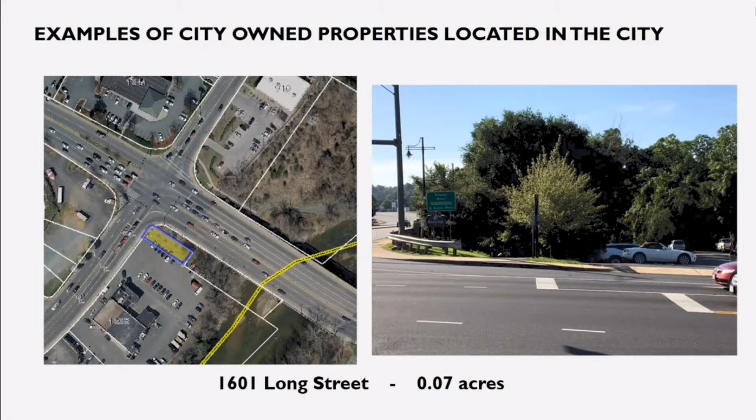Another property, and this would fall under that category or description of other parks and trails type properties. This is a property the city owns over by Free Bridge that is actually an entrance to a trail. So just to give you some idea of these smaller parcels that are located throughout the city, this is a good example of that.

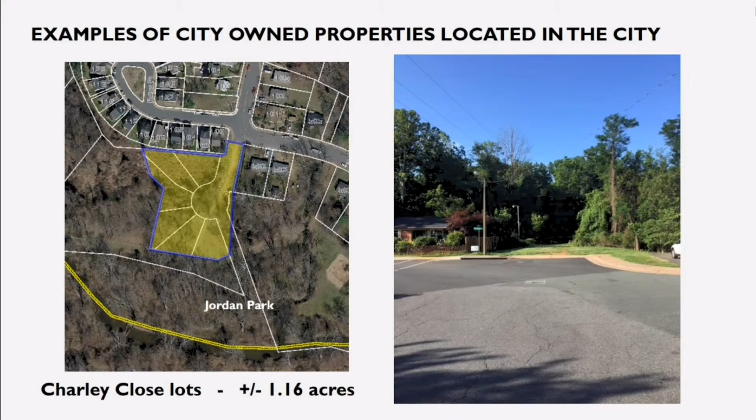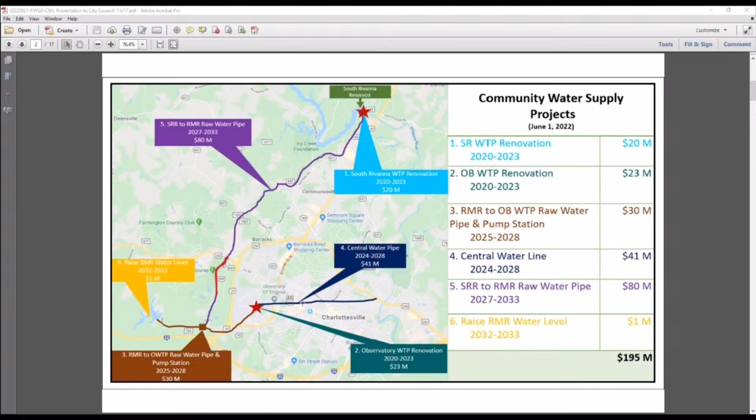if we expand the water treatment plant and we replace the raw water line to get it to the treatment plant, it has no benefit if we can't really get that water out into the system. So this was going to, again, be a larger pipe to help us get water into the urban drinking water system.

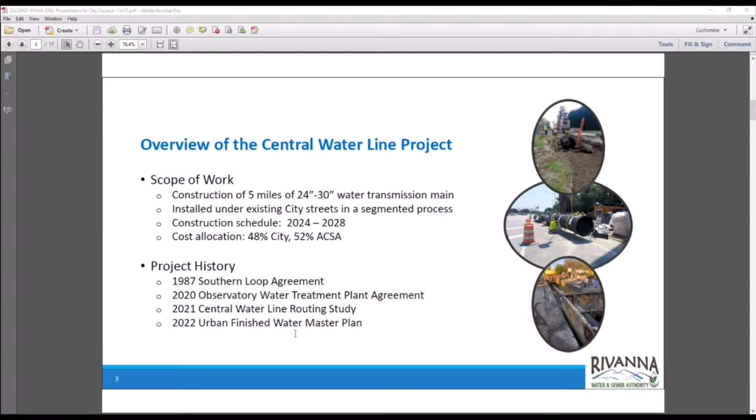Now, when I say terminate, the large pipe stops and a smaller distribution pipe takes over, the ones that the city would own. And our goal of all this was to get the Observatory treatment plant connected to the Pantops tank at Free Bridge, which is where the water line would connect.

Because our purpose is that the way we operate the system, to some degree, we make water a lot at night, and we fill all the tanks that are in our system at Observatory, at Avon, and over at Pantops. And we fill those tanks at night, and then during the day, they provide the flow and the pressure to the customers within the area, and we refill the tanks at night.

So part of our challenge was we had poor connectivity between the Observatory treatment plant, we still have it, and the Pantops tank. We can get water from Observatory to Avon, and we can get it from South Rivanna treatment plant to Pantops, but it's difficult to get water through all the small pipes across the city from west to east to the Pantops tank. And that was the problem and the issue we're trying to solve with this piping project.

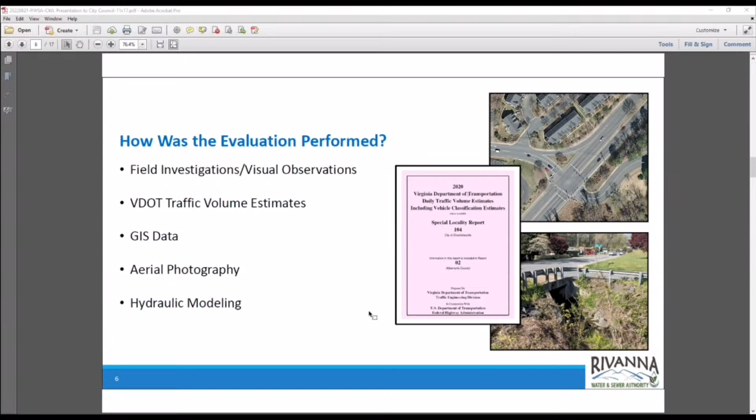We've looked at the VDOT traffic estimates that they provide. We've looked at GIS data, aerial photography, and we've done extensive hydraulic modeling to let the computer tell us how the water flows best in these various piping alternatives. We looked at the water distribution benefits from the water modeling, at the traffic counts, the impact to neighborhoods, businesses, the UVA academic side, the UVA medical district and hospital area. We looked at the street widths to see where we could work reasonably within streets.

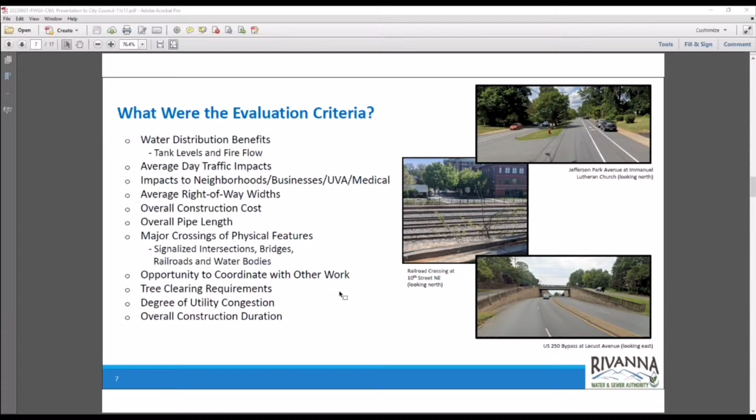And overall construction cost was an important factor. We looked at pipe lengths. We looked at opportunities to coordinate with city projects or other projects and tree clearing, and even underground utilities. It's easy to say put a pipe in the street, but if there are already a bunch of communication cables and other pipes in the way, we can't do that as easily. So we've looked at a number of different factors when we come up with the recommended alternatives.

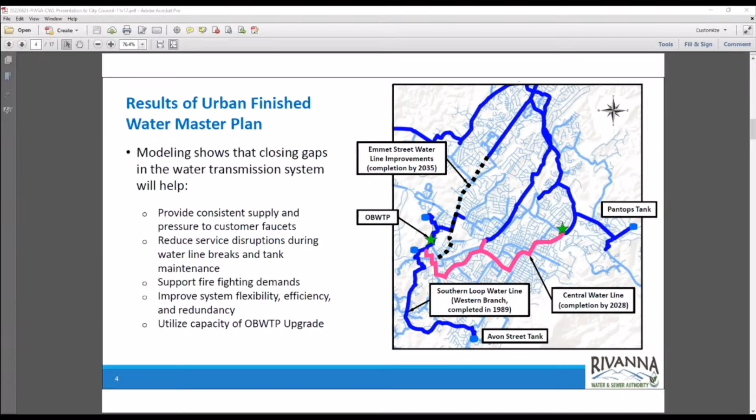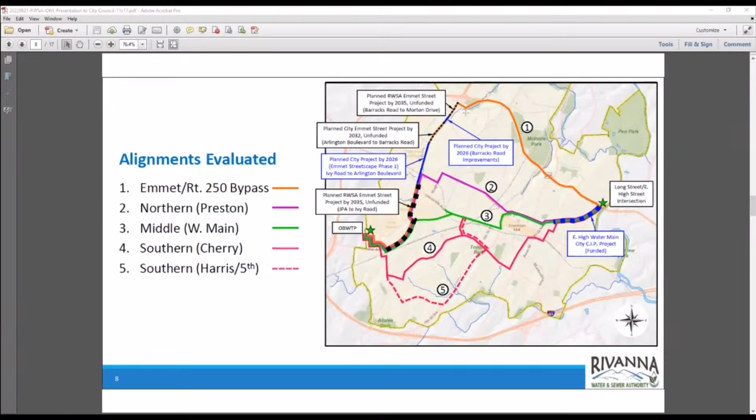Yeah, so to go this alternate route, if we were hypothetically to do it, the proposed pipe diameter would have to go up due to more flow going across that route, and also more distance in terms of friction losses. That's right. So what I was understanding, it's not just enough to say, well, there's already a pipe up there. The pipe that's being planned is 6 inches smaller than what y'all need, and 6-inch, it's significantly more piping area that would be required, so.

Correct. We did plan on this Emmet Street pipe, which is intended to be built when it's convenient, when we can have what we call a betterment project. That is when UVA is doing a project along Emmet Street, maybe at Emmet and Ivy, we're doing a betterment project with them right now. Or VDOT, when they were going to make improvements to the Hydraulic interchange, that whenever we can partner with the city or UVA or VDOT, and they were already going to rip the road open to do some utility work, we would join with them, and that would be the time we would put in our new pipe to create this redundancy with the other pipes in bringing water in and out of the city.

So it was not a definitely planned project, and we envisioned it by 2035. But again, as you mentioned, Mr. Pinkston, the purpose was to transmit water from the South Rivanna plant into the city and connect it with the Observatory treatment plant. And the pipe size required to do that is not the same as the pipe size trying to get water over to Free Bridge along a longer route. And we would have to upsize the pipe and incur additional expense. And that is included in the $60 million for us to do that.

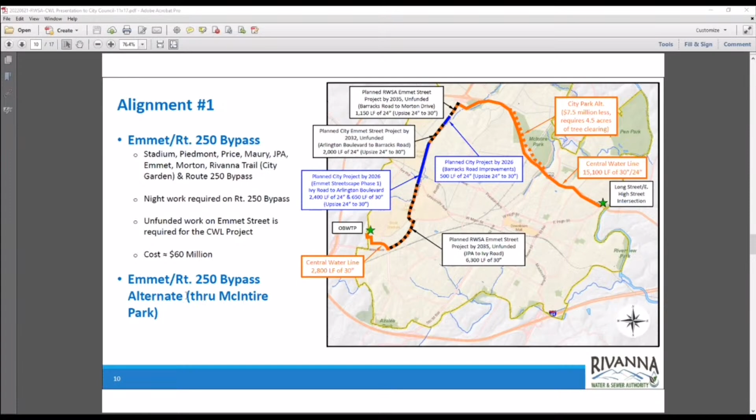So I mentioned we looked at the alternative of cutting through the park that might save some money. If you're ready to go on to the second alternative, that's what we call the Northern Preston alternative. Again, we go from Stadium up JPA or up Stadium Road, up Emmet Street. It would turn to the east through the University Lambeth area, where we connect into a city pumping station. Then it would go up Rugby Road, down Grady, down Preston. It would then go up the hill to West High Street and find its way to East High Street.

Now, that is an area where the city has a project planned along East High Street, and some of our strategy is to try to connect and do our pipe at the same time the city does your pipe, and that's why you see the blue dotted line here. This is where we are partnering with the city to do a water line project along with your project. There's also a project in an earlier section of that too.

I'm sorry, I couldn't hear you. There's another project at an earlier section. Oh, right here? Rugby to Preston. That section of Barracks, Emmet, right there, up Barracks, up Preston. The city has this project from Ivy Road to Arlington Boulevard. That's planned. And we would be partnering with the city there also. The bike streetscape, up the Barracks Road Hill up there by Rugby. Barracks Road. This turns to Rugby.

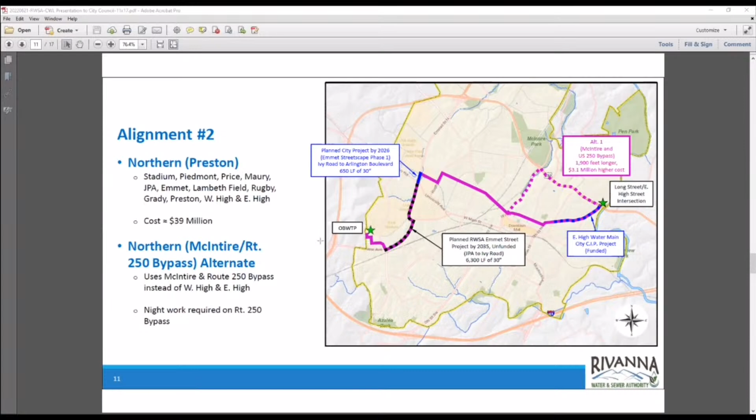Thank you. The third route we looked at was what we called the middle route, West Main Street. And I think this was really born initially from an objective of coordinating with the city on your West Main project. And of course, that's not happening anymore.

But the route was to go up JPA, then it would turn further on JPA through the academic area of the university and the medical district and by the hospital, and go down Main Street, go down at Vinegar Hill down Ridge to Preston, and then back up that hill there to West High Street to make its way to East High Street.

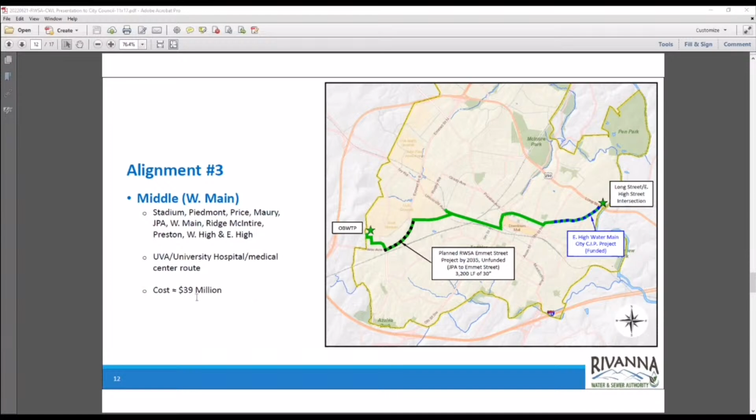The concerns with this route were the congestion of traffic and pedestrians and business impacts through the UVA academic area, the hospital medical district, as well as the business area on West Main Street, West High Street. But this one also had a cost estimate of $39 million.

But the fourth route we considered and reconsidered was going down Jefferson Park Avenue Extended, I would call it. We go down Cleveland, then we follow Cherry across Ridge Street on Elliott Avenue. It turns to the north on 6th Street, and then before it crosses the railroad track, it goes across Avon and would come under the railroad track around 10th Street, and then go to the east on Jefferson and over to East High Street on 11th Street. And that is our recommended route.

Now, when we had our neighborhood meetings, they said, well, what about going down Harris all the way to 5th Street and come up 5th Street? So we took a careful look at that. We found that there were two disadvantages. One, it was going to be about $8 million more expensive because it's a longer route, much longer route.

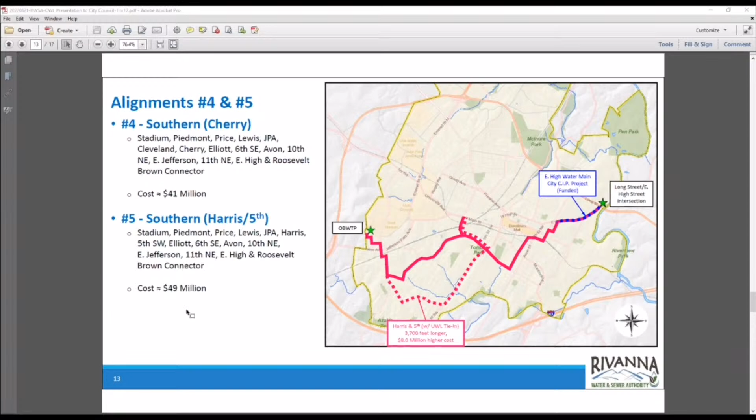And further, as you know, 5th Street is a major street for emergency services that come in 5th and then turn on Cherry to get to the hospital area. So working in 5th Street with its high traffic count seemed to be an impediment to that route. And that was the reason we were not recommending it. The estimate for the Harris Fifth Street alternative, we estimate about $49 million.

We also heard from our neighborhood meetings about going down Shamrock Road. And we've talked to Brennan Duncan pretty extensively about that because we think it would save about $3 million. It's a shorter route. But Shamrock is such a narrow street, no shoulder on one side with on-street parking, very congested. You have the railroad track and the vertical curve leading up to that, below the railroad track.

We thought, even though it would save some money, it would be a major impediment on the Shamrock Road neighborhood. And that's why we're not recommending that route, but it is possible. And further, we heard from residents about, instead of coming across.

I'm sorry, Bill, quickly, just with that one, the Shamrock alternative, it's significantly shorter. I'm just wondering that, if it's shorter, it'll take less time. If you do it in the summertime, I don't know about that impact, it'll be harder and more difficult, but it'll be quicker and cheaper. I'm just kind of thinking out loud.

Potentially, the challenge, Mr. Wade, is with that restricted curb-to-curb width of getting traffic in and out of there. It could slow down work. Oh, okay. While it's shorter, we think it will save some money and probably time, but it's going to be a real headache for the people who live over there. Either us trying to get them through, or asking them to detour to come back to their house. So again, this is a viable route, but it was our judgment, and Brennan did concur that this was not a recommended alternative.

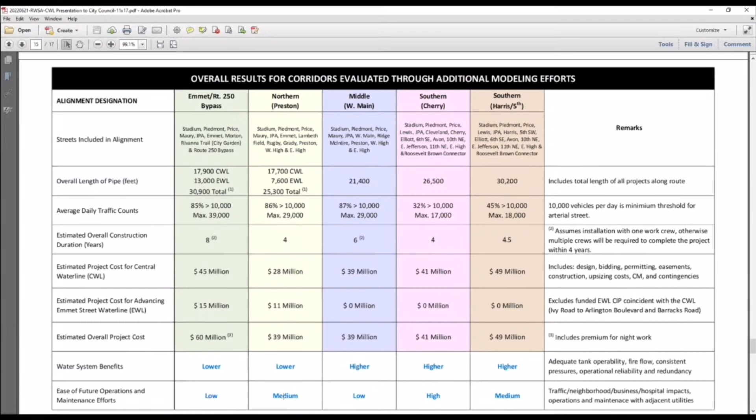And further, when we looked at our primary criteria, water system benefits, the Cherry Avenue route and the Main Street route, as well as the 5th Street route, had the highest water benefits to our system now and in the future. And also the Cherry provided the greatest ease of future operations and maintenance, that if we have a water break in the future, to get out in Cherry Avenue and work to fix it is a lot easier and less expensive than trying to work in the bypass or in Main Street or in the business district areas of the Preston Avenue alternative or 5th Street.

So this is kind of the ranking criteria that we used. We have reams and reams of data back behind these numbers, but we tried to roll them up to something that hopefully is reasonably understandable to everyone.

And let's see, in summary, Mr. Mayor, I would say that all the alignments have challenges. Not all of them work equally as well for us in providing hydraulic connectivity and allowing us to get water across the city and into the county. We think the Southern Cherry Avenue, when all things are considered, provides the greatest benefit and opportunity for us.

We recognize that there will be impacts along the way. We know there's Buford School over there that we would likely try to work with in that area, maybe during the summer. That would be our plan, when we can least impact the businesses or residents along the way. It would be all day work. And it does have the lowest impacts to traffic.

It's got a wide curb to curb street section, and we could keep traffic going around our construction area during the construction period. It's got a reasonably low project cost, and it gives us an ease of operations and maintenance. And when we do get the Emmet Street project completed in the future, it will provide the greatest hydraulic piping water flow benefits when paired with the Emmet Street improvements compared to any of the other alternatives. So that is what we're recommending, that we proceed with the Southern or Cherry Avenue alignment number 4.

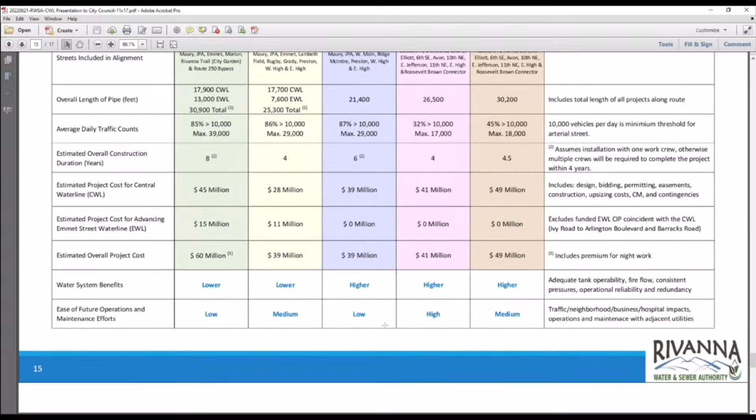I don't know if I allowed you to ask your questions, but I would be glad to try to answer them. Yeah, I thought that you said that Cherry Avenue is high on emergency vehicles and things. I know you said they take Fifth Street and then Cherry. Fifth Street would be the most high.

Cherry does have the section from Fifth Street, where am I looking? Fifth Street over to Roosevelt, right there at Roosevelt Brown. Yeah, so let me see. Yeah, this is what I was looking for. So Fifth Street coming in at Ridge and Cherry, and this section right here would be high traffic as emergency traffic particularly is trying to make its way to the University Hospital.

Mr. Moore, can you go back up? But otherwise, Cherry is the lowest. So that's reflected: on Cherry, only 32% of the length of the route has more than 10,000 vehicles per day, which was the lowest percentage of any of the routes. I think, Juan, that over here on Cherry Avenue to the west of Roosevelt Brown Boulevard, the traffic count there is like 5,000 vehicles per day.

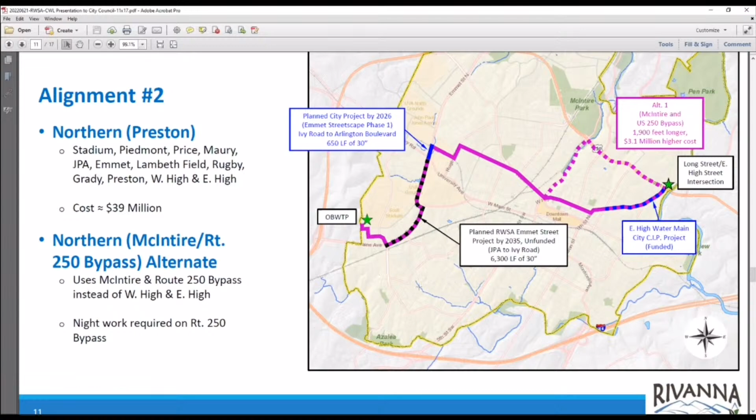And then if you could go back to the summary, please. Yes, sir. So one of the things that's really important to me is the duration of this. That does connect to cost, but it also connects very closely to aggravation and frustration for people. And so the ones that are 4 years, which are the northern and the southern Cherry, is that partly reflecting the fact that those roads are wider and you've got more room to work in them? Yes, sir. We would say more constructible. They're wider. We have more room to work and to detour traffic around us.

Again, the bypass would require night work, which typically is slower, and we have to deal with all the traffic out there. It's a possibility we would close 2 lanes and have to build a temporary lane over to the second 2 lanes and create one-way traffic on each of those lanes in order to work during the night and then restore the two-way traffic by 5 a.m. the next morning. So, as I guess you said, you're not going to be able to cut the 8 years in half by that kind of work. But by those kinds of efforts, you might cut it maybe by a third or 40% or something.

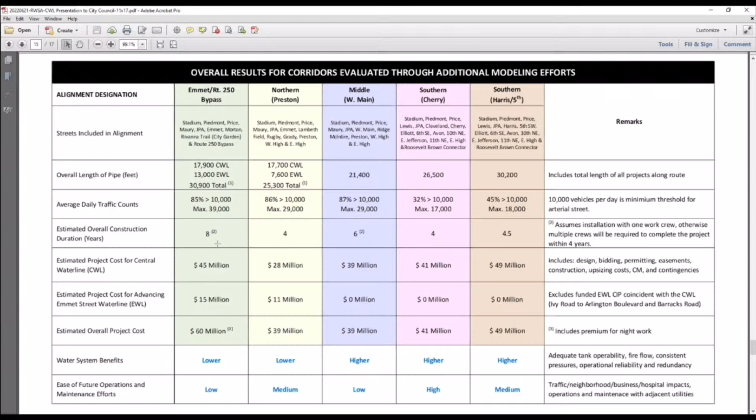Turn to alignment number 2, I think, Northern Preston. I guess I'm still not understanding 2 points. One, you mentioned that the neighborhood disruption there would be too great to make that, in your opinion, a route you'd recommend. I'll just ask again, the route that is recommended obviously includes in part going through residential neighborhoods, including public housing and other low-income communities. Is that evaluation, that the disruption in alignment number 2, the Northern Preston route, for neighborhoods is too great compared to the disruption in what is recommended,

is that based on specific traffic data, specific data about density, or was that a subjective evaluation that was made? I think we have data, Mr. Payne, but we did have some subjective view of it.

But like in the public housing area on 6th Street, that's a very wide curb-to-curb section, and the houses are pretty far away from the street, whereas on Grady and Rugby and Preston, those houses were much closer to the curb, and that's where the subjective part came in, that we had little room to maneuver within the curb-to-curb area, and our noise and disruption was going to be right on top of the houses, compared to the Cherry route, where yes, maybe in some places it would be, but not as much as the Rugby, Grady, Preston area.

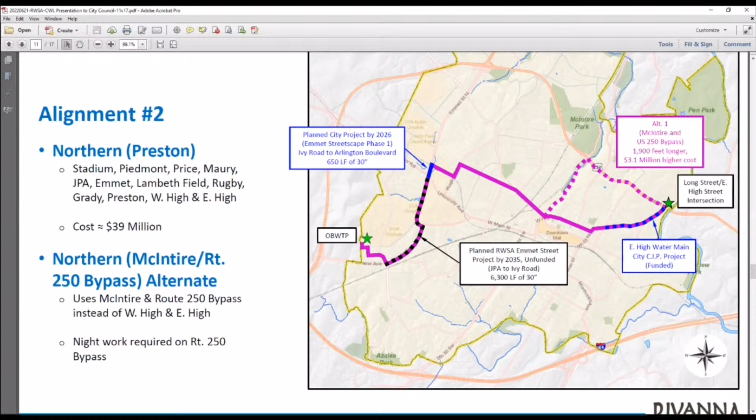And then another question in your chart outlining the pros and cons of each. In the Northern Preston route, the water system benefits are listed as lower, whereas the route you recommended, that's listed as higher. Could you quantify what that means specifically, and is that based on specific data?

Yes, we ran dozens and dozens of water modeling scenarios about how water could flow through the system under different conditions. And when we collectively looked at all of those water modeling runs, we somewhat subjectively had a decision about which routes had the lowest impact or the best impact on the water benefits that we were looking for.

Jennifer, do you have any data that you could offer Mr. Payne or Michelle? Sure. So as Bill indicated, we looked at probably well over 20 plus runs, and we looked at the water modeling. We looked at how the tanks operated, whether they worked well together, whether there was a significant separation. We looked at fire flow. We looked at each water treatment plant running under different demand scenarios.

We looked at if we had a break or we had a major maintenance event, if we were operating under drought. And then for each of those scenarios, we looked at how the system was operating. And in some cases, one was slightly better than the other. And we looked down that list of the 20 or 30 runs and assessed which set of conditions posed the greatest benefit to us.